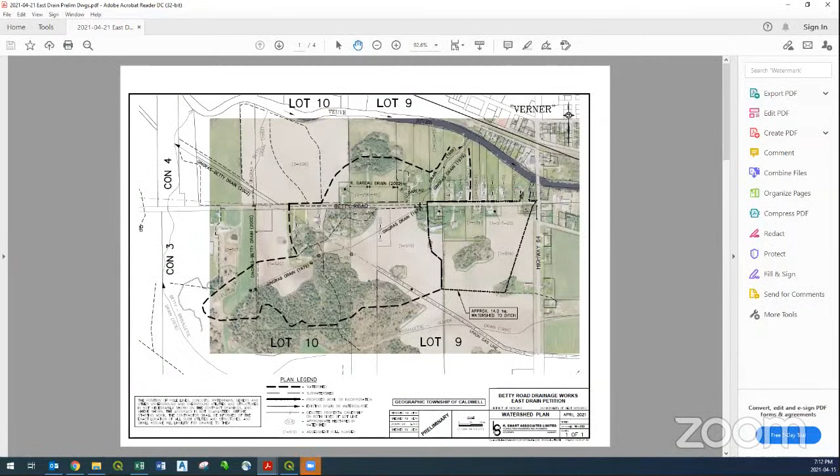And Melanie, would it be, in the midst of all this technological wizardry, possible for me to share my screen? I already gave you the powers. Okay, let's see if I'm clever enough. I knew you might have visuals. Yeah. Share screen, here we go. And I'm going to use screen number 2, share. Hey, Joel? Yeah. Here. Sometimes if you use multiple monitors, it won't work. Like if you're using an extended desktop, because we can't see anything, all we see is that you started sharing a black screen. You might have to get back on your main monitor. Okay. And I'll do that. If you want the watershed plan, I believe it's working. Okay, good. Yeah. Because I struggle to survive with just one screen.

All right, so the watershed, as folks are generally aware of, for the gully that we're looking to improve and do the drainage work on, is there at the east end of Betty Road. So everybody that's inside this black line received an invitation for this meeting tonight. So we wanted right from the outset to keep everyone that's affected by this drain, which for now I'm going to propose we give the name the East Drain. It's not particularly original. And if anyone would like it named after themselves, let me know and we could do that. But for now, we'll call it the East Drain.

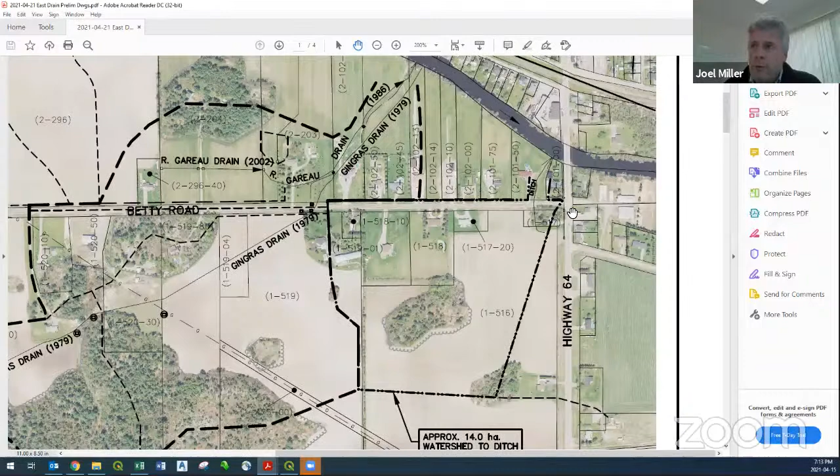And so we had a meeting just over a year ago to look at what our conceptual thoughts were on how this would be improved and what we can do to deal with the bank instability and the erosion and things like that. And then coming out of that meeting, the intent was for us to look into the possibility of having this job given emergency designation by OMAFRA, because that would allow us to go in and begin work in advance of having a report without jeopardizing the possibility that farming properties would be able to also receive grant for a portion of their assessment.

Now, when I spoke with OMAFRA last spring, they indicated that it was not a case where they can do emergency designation. They prefer to do that only for existing drains. And so since this is not a drain yet, we were not able to get the emergency approval from OMAFRA to carry on with some work in the field before we have a report in hand. So that's where that stands. So the task really is for us to wrap up the design, get it to the agencies, and get a report filed as soon as possible.

So that's more or less the highlights of what happened in 2020, and I'll freely recognize that it was not as much as any of us had hoped could happen in 2020, and that's unfortunate that we didn't make more headway, and that's on me, frankly. But I do recognize that we don't want to let this languish, if you will, right? So again, I'm now going to bring my screen down a bit more to hopefully show another drawing. Did that appear for everybody? Yes. Yeah. Okay. Very good.

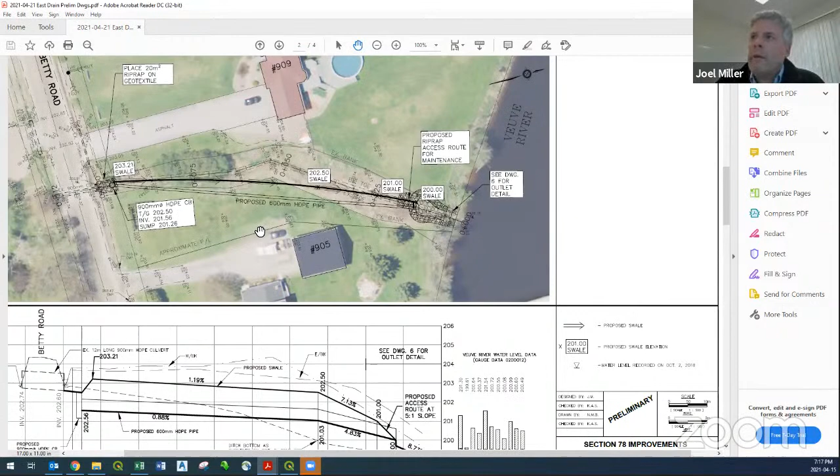The first is there ought to be a pipe as part of the system, because that would carry the vast majority of rain events and eliminate an ongoing flow. And then there would be a path for the water to take when the pipe was full. So perhaps in a really serious spring melt event or a really serious summer rain event, there'd be an overflow route. And so we refer to that as a proposed swale. And on this concept that we've put out here, today is a great time for feedback, Diane and Linda, from both of you and anyone else that's listening in, Lloyd as well as the road authority.

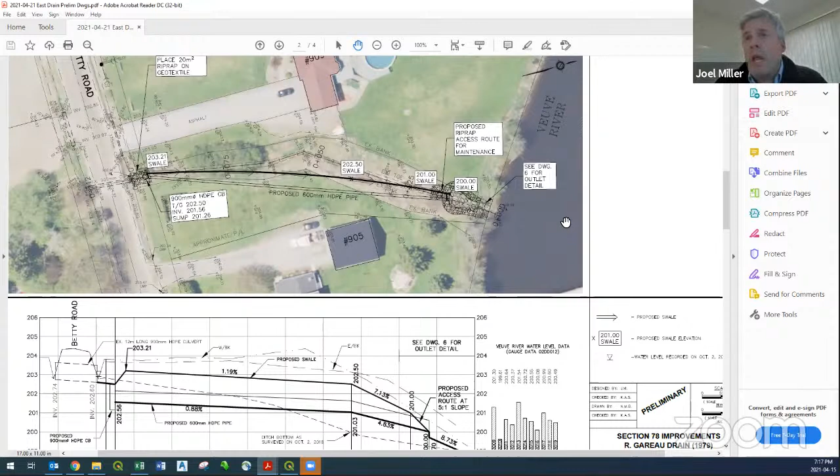We have just run the pipe in a straight line because it's nice when you can look in one end of the pipe and know where it ends up. It would be an option for us to lay this pipe in more of a curved pattern just inside what would be the east bank of the gully, and then have the center line of the stabilized ravine or the stabilized gully more closely aligned with the existing route.

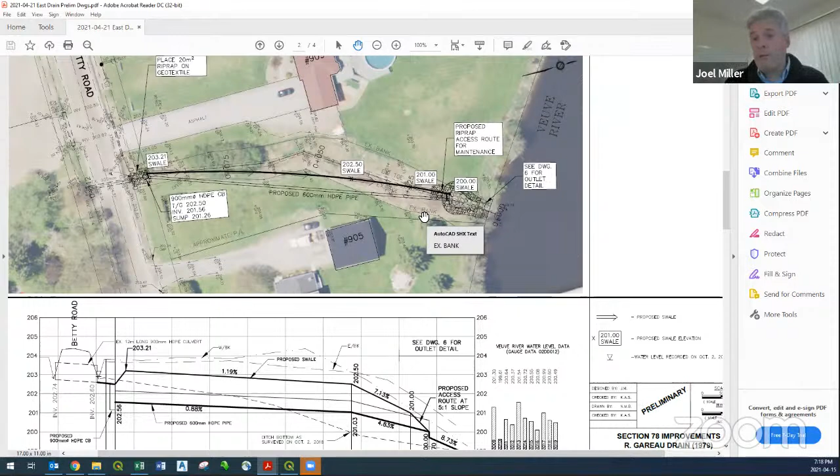But from my perspective, I'd rather see the pipe run straight, because then everyone will always know where it is. It runs between point A and point B, and there's no mystery as to what curvature it has without putting manholes and structures on it, because that just creates extra cost. And in this case, it's a short run of pipe. It's within sort of standard MOE guidelines for length of pipe between structures. It's just under 100 meters of pipe. So that's kind of the alignment for the pipe that we're recommending.

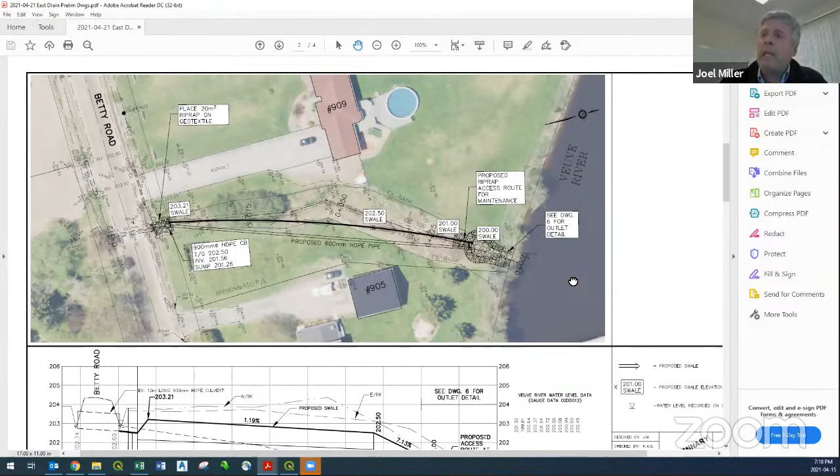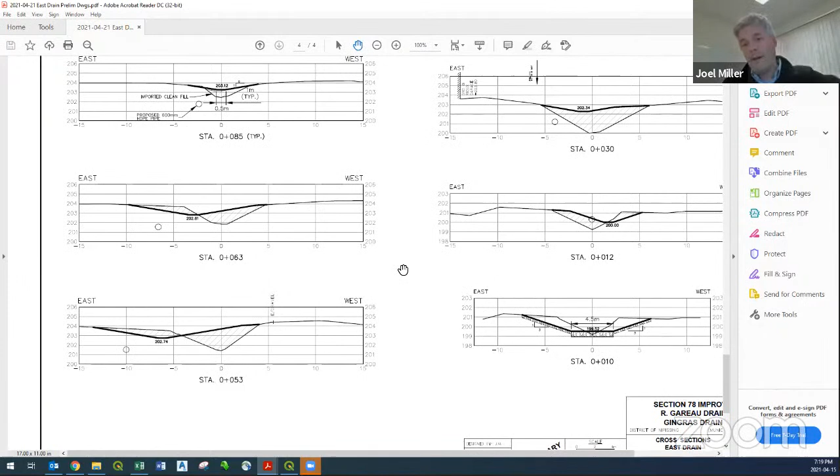And then what we're looking to do is backfill the swale so that it's not as steep and so that it's stable, most importantly. And so the cross sections that we have worked out, and this is just a bunch of lines on paper, if we were in person and we could kind of point and explain it firsthand, it would probably make quite a bit more sense. But we're looking to have, at least at this stage, backfilling the swale, backfilling that ditch with material that would be brought in potentially, so that most of that ditch would be mowable, right? So it would end up being a much shallower ditch than what's there now.

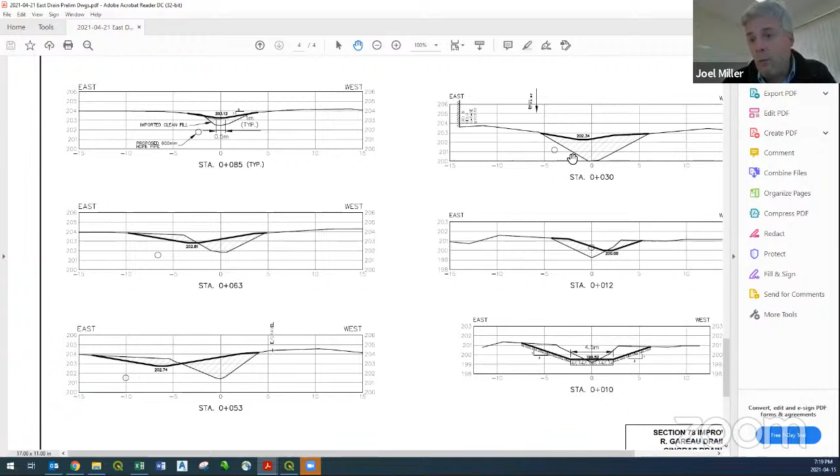It would still allow water to overflow during major events, but it would be stable, and it'd be quite easy for you guys to look after. If it's lawn and you want to use it as lawn, go back and forth across it, et cetera, then it would more or less be lawn with a dish in it that has flat enough side slopes that could be mowed. So that's sort of the concept we're working with now.

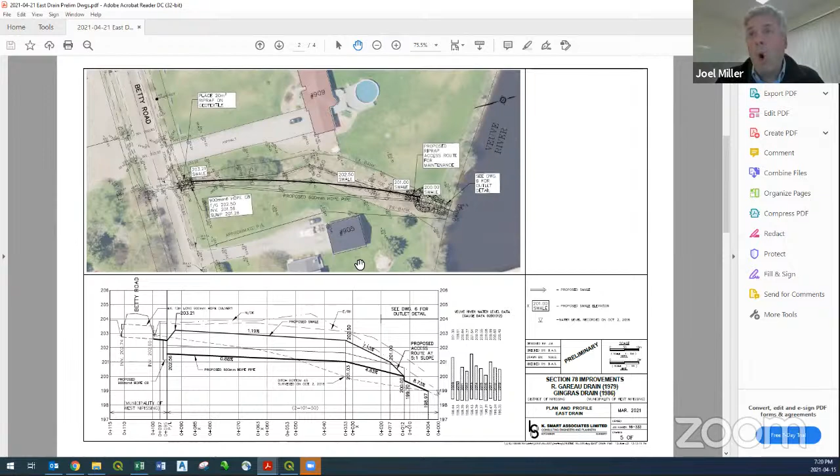Now, in chatting and reviewing some recent correspondence from you, Linda, I recognize that your objective is for this thing to be stable, and whether it is mowable or not is not as much a priority perhaps for you, but as I looked at the site and the condition and the setting for this project, it seemed reasonable for us to try to backfill this and get it stabilized, get it vegetated, and then make it easy for folks to mow and use.

And then the most important part of this whole adventure is here near the river, where the pipe would outlet. We don't intend to dump the pipe out right at the riverbank, because over time it becomes a very difficult to access maintenance issue, because it's situated right on the perch of the edge of the river. And so what we've done elsewhere and what I think is wise in this case is for there to be what we'll call an outlet structure, which is nothing more than a sort of dished area where the existing ravine or the existing gully enters the river.

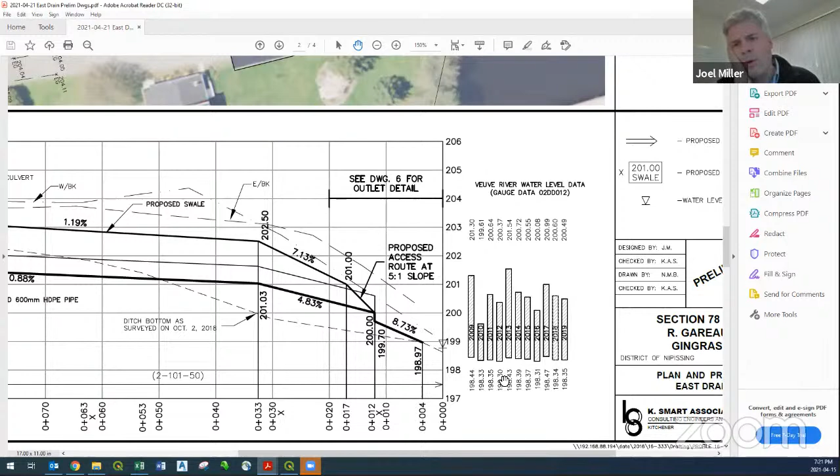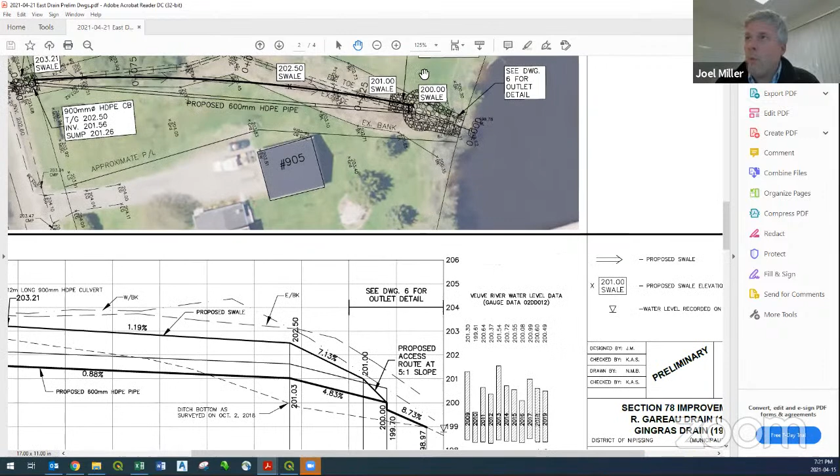That would be made up of very large diameter stones, angular riprap and these kinds of things. And I think I showed you guys a photo of an example of that from another job, similar to what we did at Delorme Road, Lloyd, the outlet for that pipe. And one of the reasons that it's important for us to do as much stone work as I'm proposing is the spring thaw. Oh, hello? Spring thaw. What happens when the water level comes up in the spring? That will prevent erosion. Exactly.

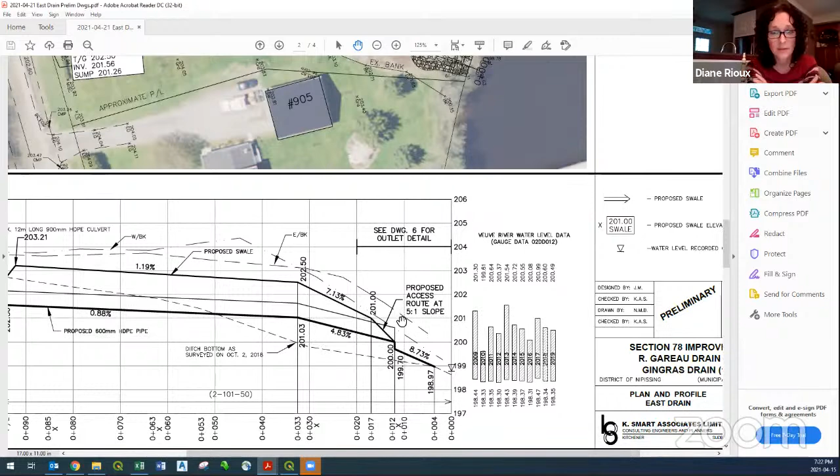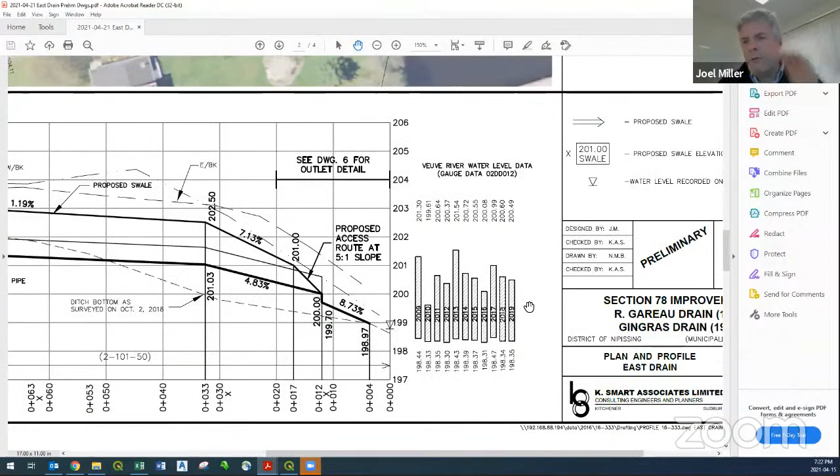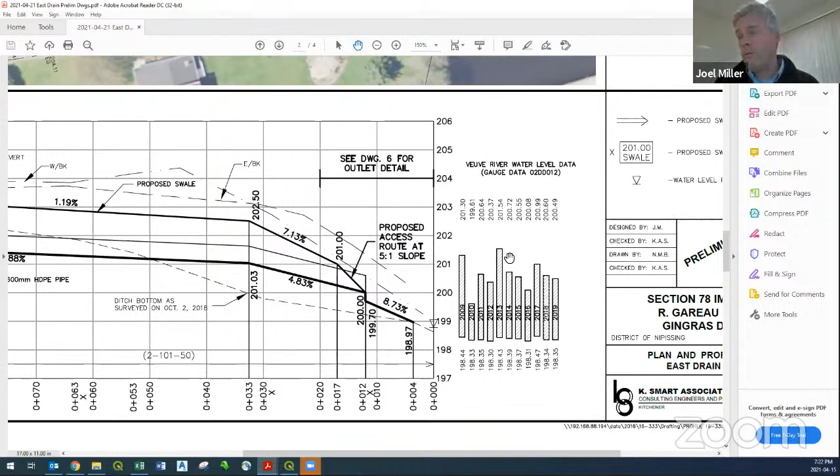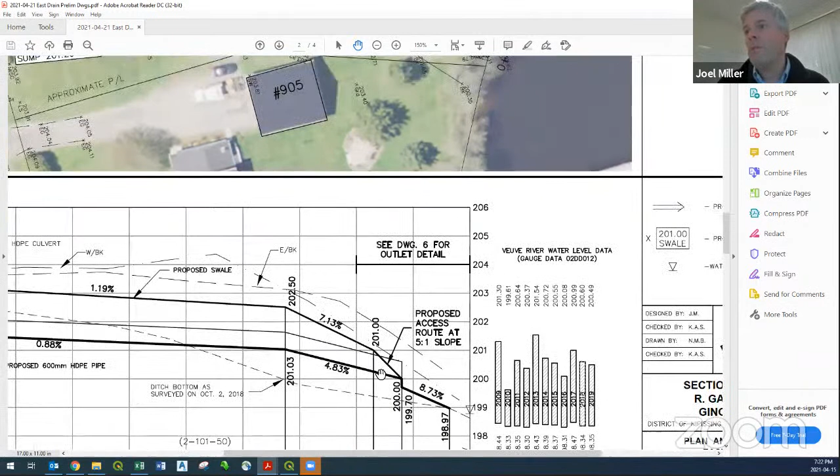In that area? Yeah, that's the objective, because on this profile part of the drawing, we've collected river level data from the gauge that's right there at the bridge, and we've related that to our survey. And it's clear that different years have different high levels of river water, as you would expect. But more or less every year, the lowest 20 meters or even 30 meters of this ravine experience a water level due to the river rising up and down. And so if that portion of the system can be armored with big rocks, then that'll stabilize it. And that's the objective.

So those are the three main pieces of this design: a pipe, an overflow swale, and then a bunch of rock down at the bottom by the river. So that's kind of the concept design we've put together.

And I can even say we've done an initial cost estimate. We haven't looked at all the details and sort of dotted our I's and crossed our T's. We'll have a more up-to-date cost estimate when we have our public meeting with the whole watershed. But our construction cost estimate for this work right now is between $50,000 and $60,000. So that's what we are estimating based on what we've put together so far.

And one of the comments, Lloyd, that Sean had made for us to look into would be up at the road where the existing culvert comes under the road, and then Linda's driveway culvert empties towards this ditch. Right there near the road ditch, we would put in a catch basin as a place to take the flow into the pipe. Okay. Yeah, so we've been in discussions with Sean a little bit about that concept.

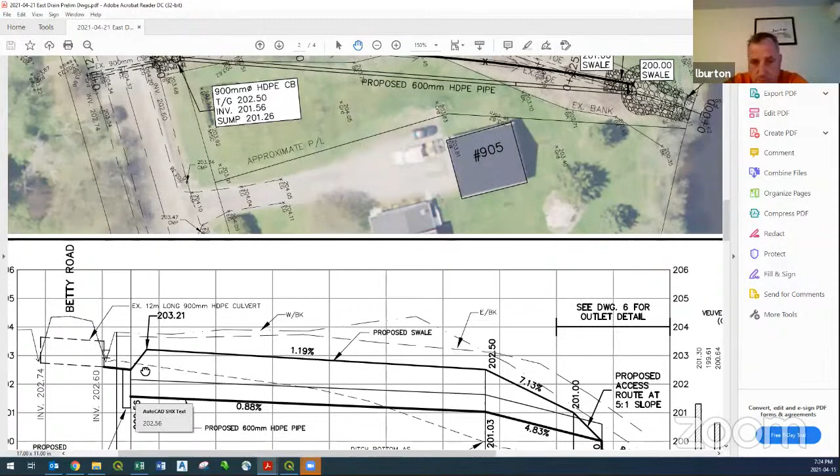And then the idea would be water would, under all normal circumstances, run through the pipe. But if the pipe was full or, say, iced over or something of that sort, then water could spill over the overflow swale before the water level in the ditch rose to a point that would cover the entire road culvert or back up over Linda's driveway. In fact, that spillover point for the swale is 1 meter lower than Linda's driveway. Okay, so there's room, yeah, lots of room.

Yep. Can I just say something quickly for those who are listening? I suspect they were all at one of the meetings. The reason for this thing in the first place is because the type of soil in this area cannot take the flow of water. Something has to be put there because it just keeps washing away. The more water goes down it, the more sediment gets washed into the river. And the pipe seems to be a solution for that.

If the water isn't running steadily on through the ground, there's less collapse, and the soil's not being washed out to the river. Mm-hmm. Yeah, there wouldn't be flow in the bottom of a deep ditch anymore, and then the other factor is there won't be backwater from the river loosening the side slopes of the banks either. So I think that's the direction we're heading with it.

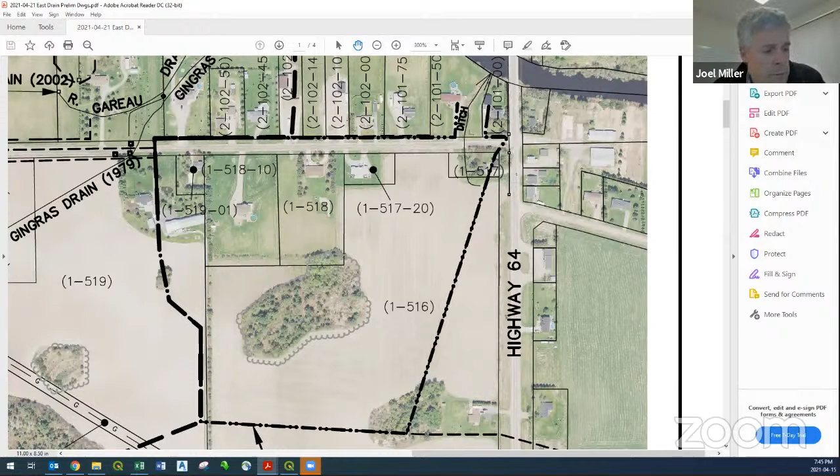And I don't know, Melanie, I think you would probably be able to speak more knowledgeably to the sort of future land use potential. Yes, well, I was just going to point out that, first of all, this is a really little watershed. So this watershed only consists of 1, 2, 3, 4, 5, 6, 7, 8 properties plus the road. The biggest property in this watershed already has a house on it. And even if that house was severed out, another house can't be built on it because it's zoned agriculture and it can't be developed. That's this house down here.

Yeah, that's Joelle's house. So that property is not going to ever have any houses on it. And the other ones, there's really no further development potential on any of those either, because the houses are kind of built right in the middle of the lot. So I would say the likelihood of anything happening in this little watershed in the future that would impact the drain would be very, very low. Mm-hmm. I can't imagine what could happen that would do that.

And I guess another comment would be that the report that's also going on to the west clearly delineates that the service area for this ditch does not extend any further west than this divide right here. It will not either, is what you're saying. There's no risk to us that the problems down the road are going to be redirected in this direction.

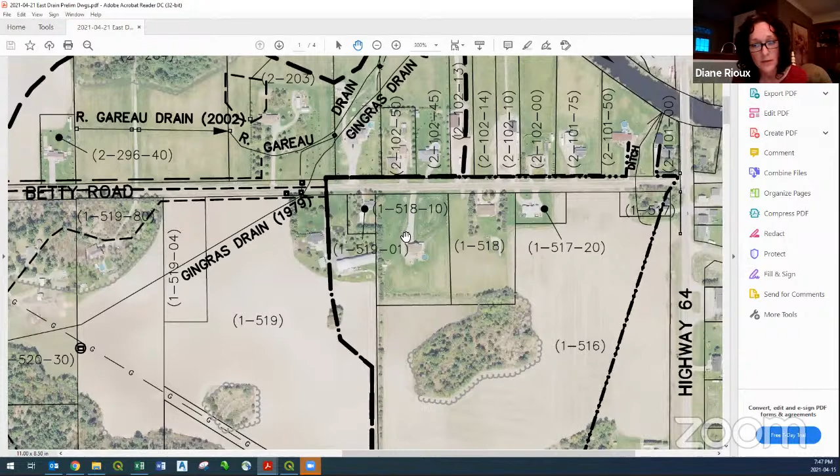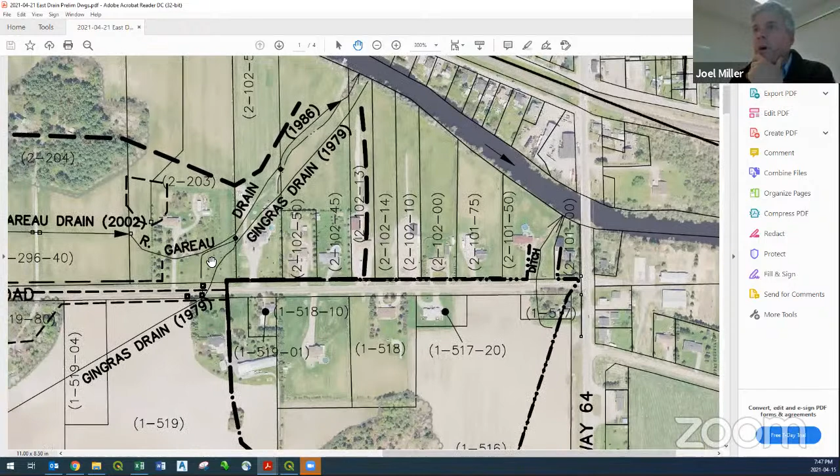Exactly, because this report that's going on for this drain is proposing improvements to be done along the historic corridor. We've done an options analysis to bring this water all the way down the road and then this way, but that doesn't make any sense financially, and it doesn't make any sense considering what we're trying to address down here. So I've explained that to a handful of the landowners that I've talked with in the interim further to the west, Renee and Peter, I believe, mostly. But that'll be part of the presentation I give at the public meeting later in the spring.

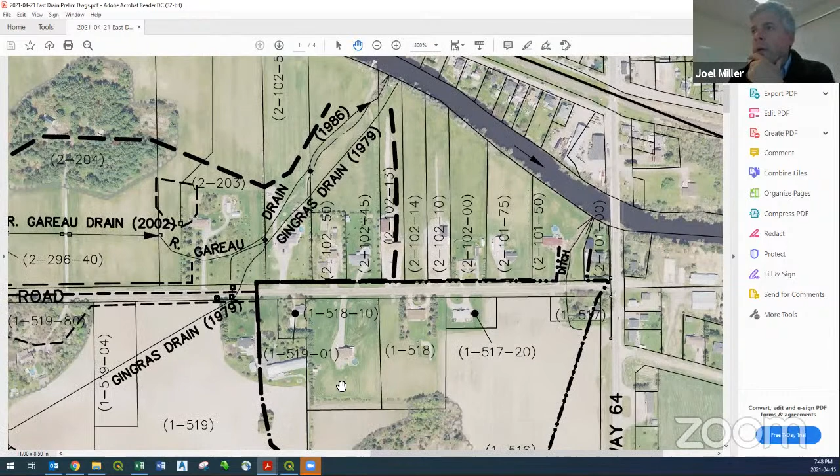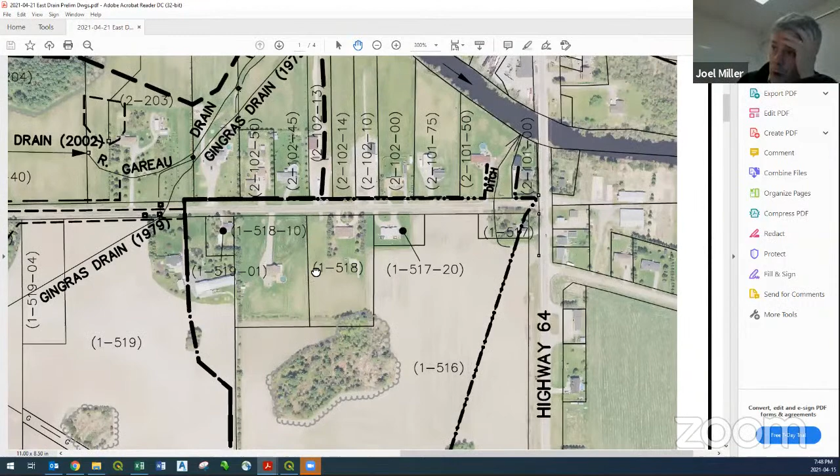And then the other comment I was going to make, if there were future severances in this small watershed, the Drainage Act requires that those new small lots be allocated a share of the assessment that was originally made to the big lot. That way, every landowner in the watershed continues to bear a portion of future maintenance costs. And then the other reality is, given the size of the watershed and sort of standard engineering design practices, incremental increases in flow within the scope of what's likely to occur in this watershed would be adequately handled by the system.

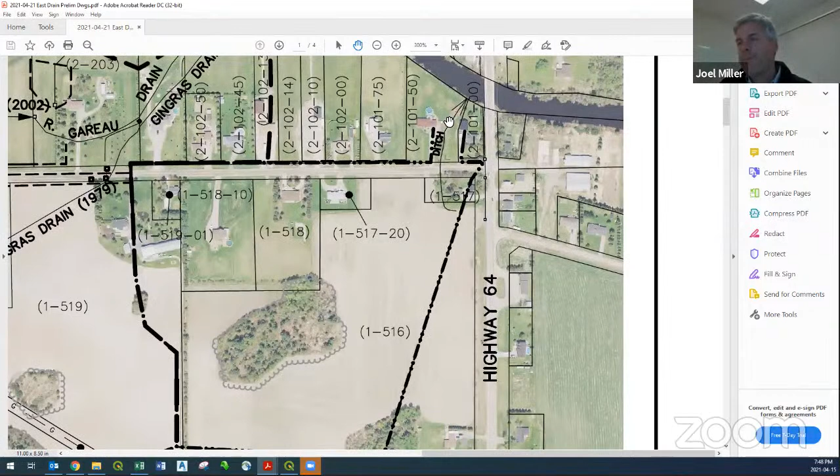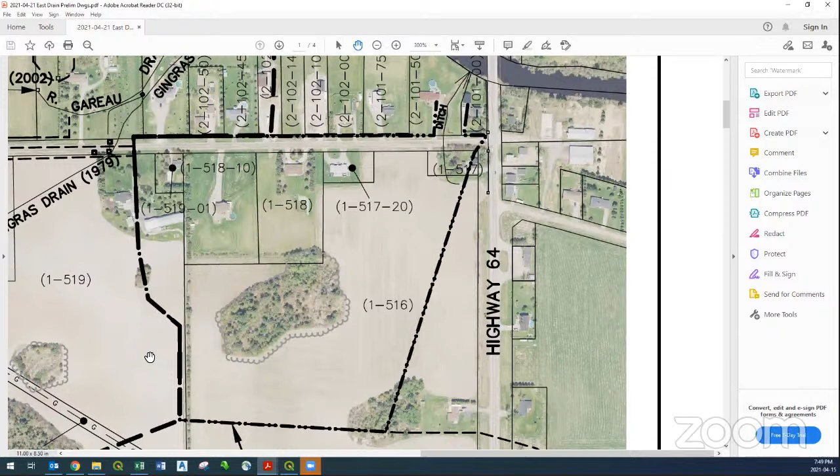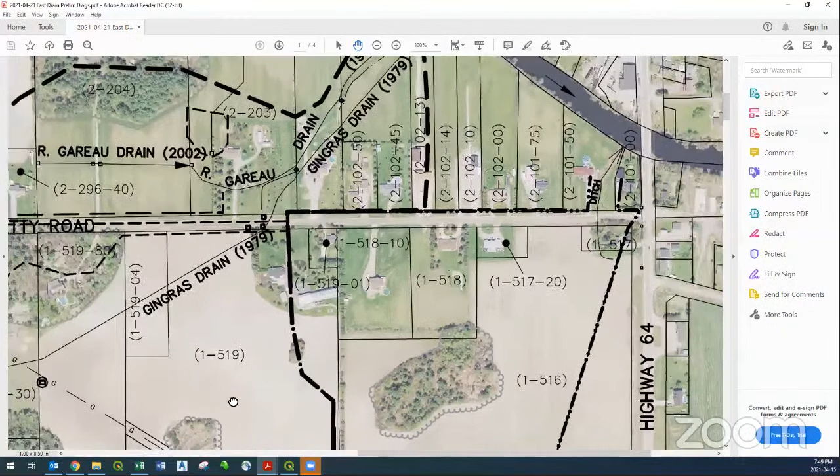Yeah, Joel, your watershed that you have established on this plan. Yeah. Your design is specifically designed to that watershed for that outlet pipe going through the Bazinet property. Yep. The Bazinet property. So if that watershed was broken up to the west, say, that would cause you problems, but that would only be if somebody broke that watershed. That's not allowed. Yeah, it's not allowed.

Right now, the divide is Briette's laneway because he doesn't have a culvert under it, and so that is the divide now, and that's established in my report. His lane culvert would be under the municipality's jurisdiction, and so there wouldn't be additional flow that's going to be brought east.

Yeah, so these watersheds are very, very important, and it's very important that they're respected and that nobody goes monkeying around with them. And if somebody does see a watershed getting fooled around with, then the municipality should be notified, and the proper action be taken.

And that's when you show up with your big hammer, right, John? And my big stick. There you go. Yep.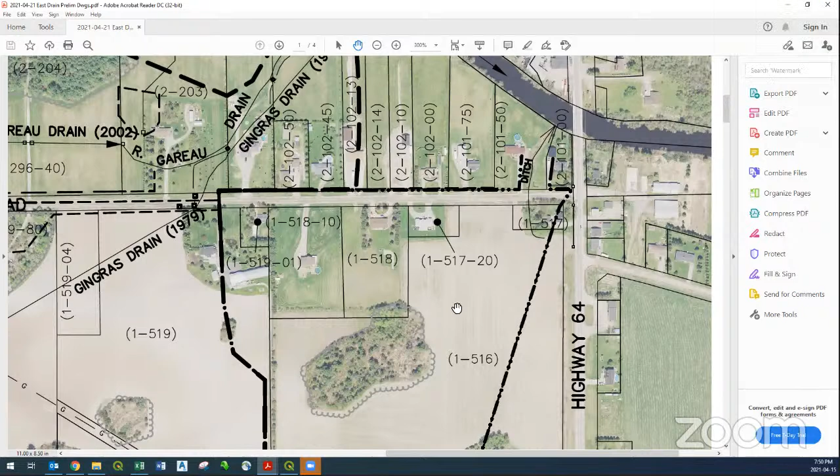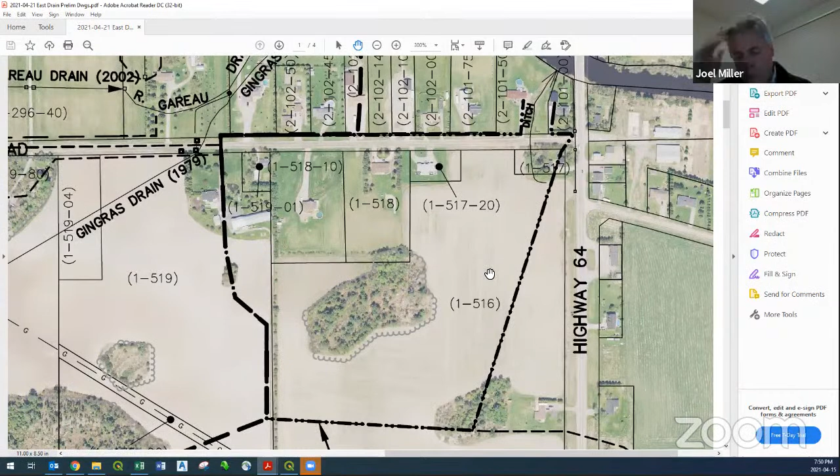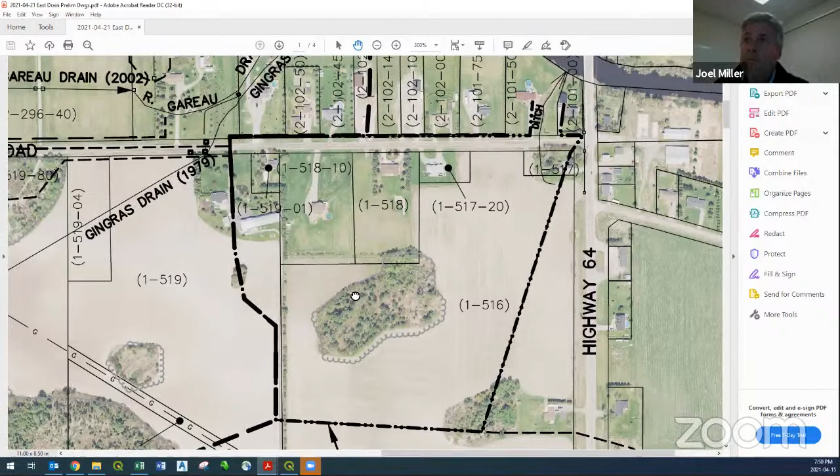No, on this project for the investigation for the drains further west, there's been considerable discussion over the course of my involvement about that particular topic of watershed delineation, and so that'll be something that I'll speak to when we're getting together later this spring with everyone. So the meeting this spring is going to include both watersheds? Yeah. Yep.

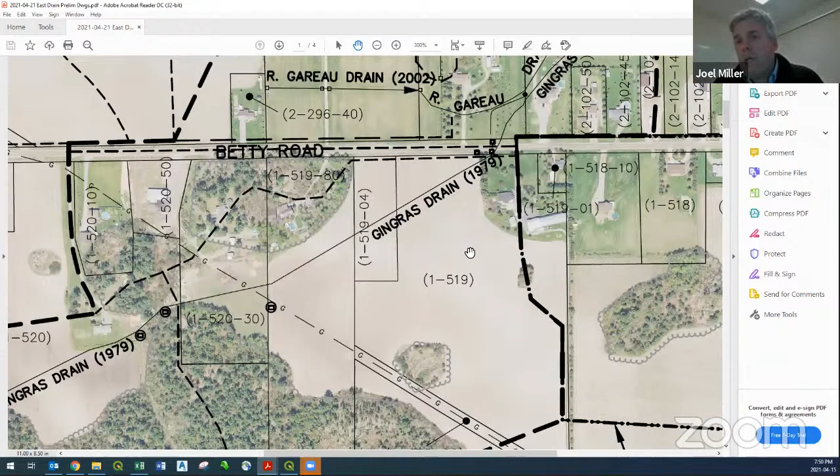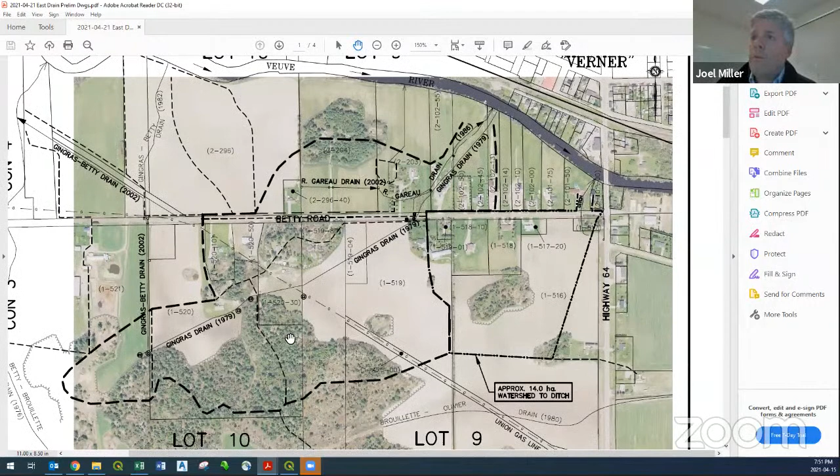Because the intention is, right now this road has, I'll zoom out a little bit, it has the municipal drains along this road developed over time as needs arose. And so there's 5 or 6 municipal drains just in this vicinity. So the appointment we've been already given is on the Gareau drain and the Gingras drain. And so my report was going to deal with both of those under a single report.

So my recommendation, with this new section 4 petition that came in after the initial investigation started, would be that this work that we're going to do on Linda's property, as well as the work that's going to be done on those other drains, all be presented in the same report to all of the landowners. Now, just because you folks would be at the meeting later this spring doesn't mean you're going to share in any cost or assessment for the work that's further west. Your share of the cost is related to the drain that you're part of the subwatershed for.

But I think from the municipality standpoint, from a maintenance standpoint, it's easiest for them if they have one updated report that documents where all the drains are, what are the current assessment schedules, because one of the other challenges in drain watersheds is that when there's severances, it's important for those assessment schedules to be updated. So when the drainage superintendent does maintenance, he can spread the costs out over the people that actually own the land in the watershed at the time. So that's kind of where I'm heading with it. So the name of the whole report might end up being something like the Betty Road Drainage Works, and then it'll have all these individual drains that are going to get improved or built for the first time.

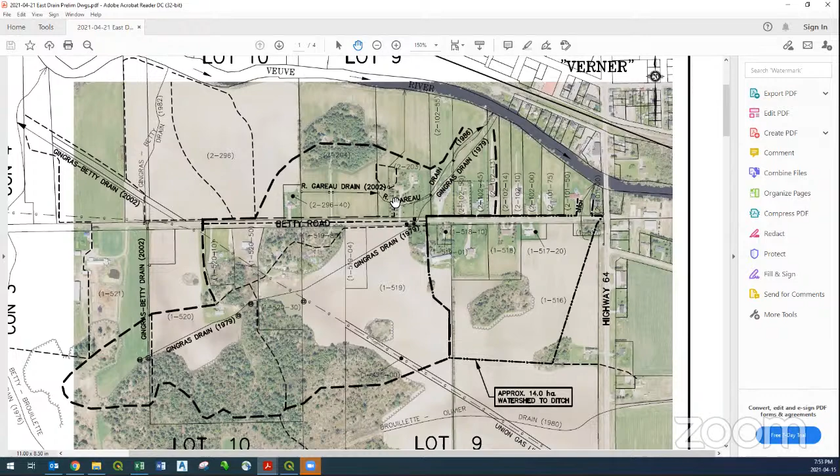And I'm not sure if you gave that information, I might have missed it. Did you mention how big the pipe would be in the ditch? I may not have. We're looking to put in a 600 millimeter pipe, so that's 24 inches. Okay. And the pipe that's under the road right now is considerably larger than that. Is that going to work? Yes, it will. So the pipe going under the road is 3 feet. So a 2-foot pipe obviously has less capacity, but what we're putting in is a smooth wall pipe. And so it would have more capacity than corrugated pipe of the same size.

Understood. So the excess water would not erode the rest of the property in the spring, because obviously there would be excess water, right? If it's a 3 foot culvert and that's a 24 inch, the excess water would flow down and it would not damage the property. Yeah, the idea would be that the extra water would very occasionally flow over the swale, but that swale will be vegetated and will be able to handle the water. Okay. Because it's not going to rise high enough to damage the building around it? No, because the gully will be low enough. Because I don't want to lose my driveway, absolutely not. And Diane doesn't want to lose her garage.

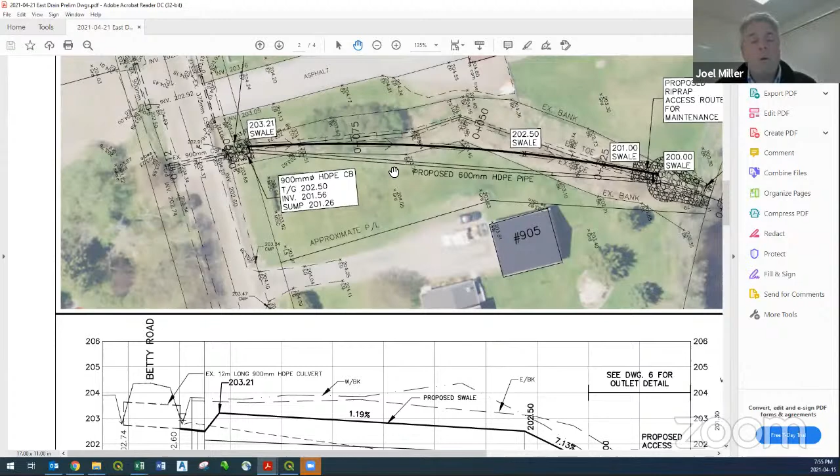So you can give me 100% guarantee that no more erosion will occur on the property. I can give you a 100% guarantee that her garage, and don't call my insurance company and tell them I said this, but what I'm looking up right now, and I'll present all this in May, is what's the design storm that we're designing to, whether it's the 100-year or the 25-year storm. So the pipe we're putting under the yard is being sized to the 25-year storm. That's a storm so bad, statistically, there's a 4% chance it could happen every year, but most of the time it would happen once every 25 years or so. So it's kind of a squirrely way to talk about pipe sizes.

But that's more or less the only thing I'm questioning as well. What worries me is when there's erosion, it could occur underneath. You don't see it until it erodes, right? That's what happened here. It's like you've explained, it happens underneath and then it collapsed. You don't see it collapsing until it collapsed.

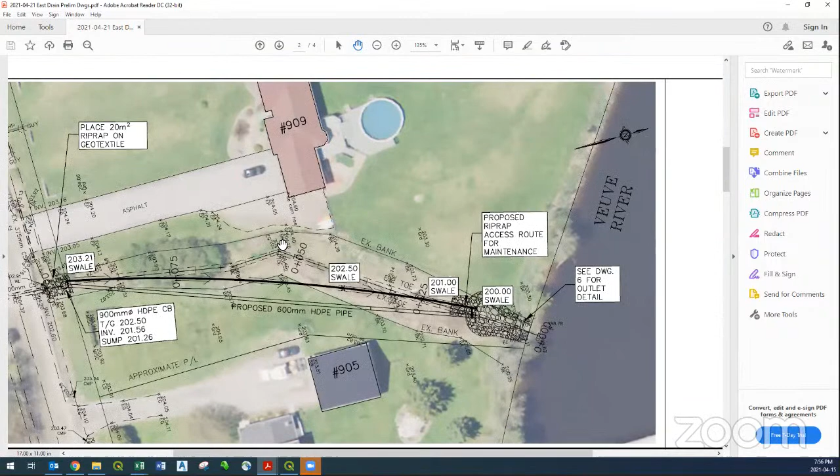My worry is, what is underneath my driveway right now? Is there potential to collapse any time? That's my worry. How do we see if there's an erosion problem that we don't see as of yet? That is just like a time bomb that could happen anytime. Yeah, that's a good question.

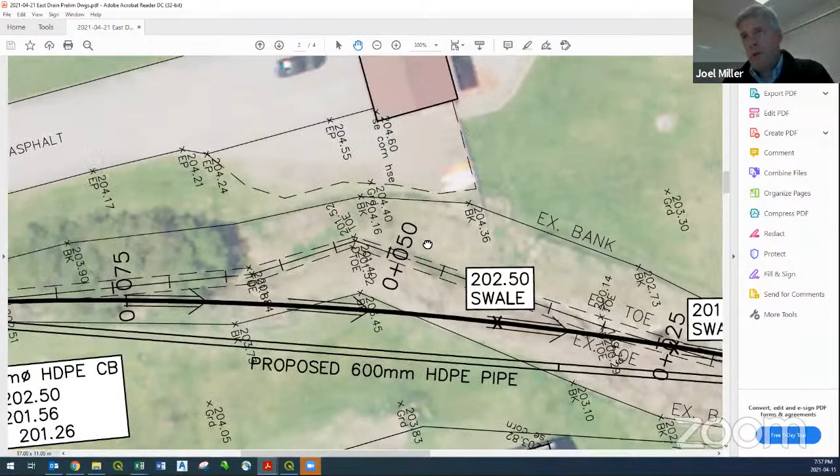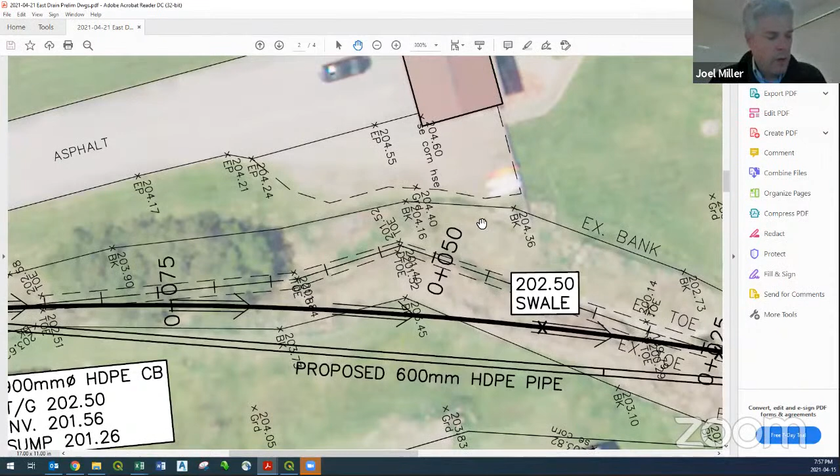So when we did our survey along your driveway, and this is shown on the screen, I realize your screen may be kind of small, but one of the questions I wanted to ask today is whether you've seen any changes to the top of the bank near your driveway where you have that little parking area. Mhm. No, I don't think we've seen anything, no.

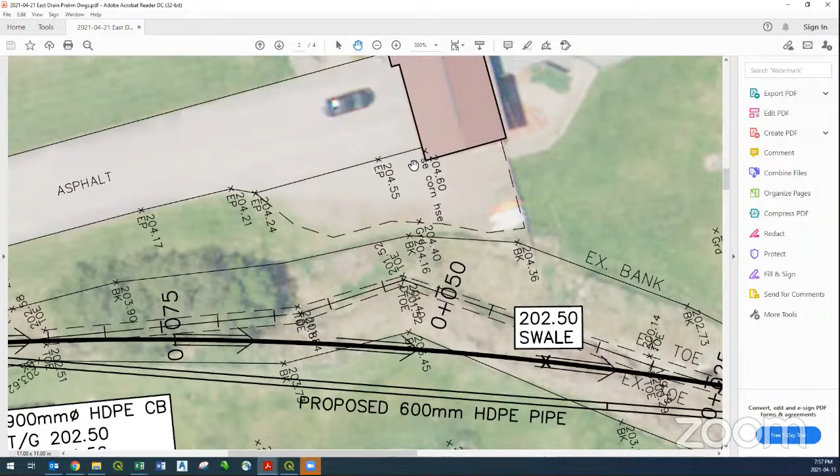But we didn't really walk the property. We should maybe do that. I will do that before the next meeting. Okay. Just looking outside, no, I did not see anything. But I did not check the width of the groove that runs to the river. You remember where you could put your hand in there? Yeah, I did not. I'm not sure if it would or not. I will have to verify that.

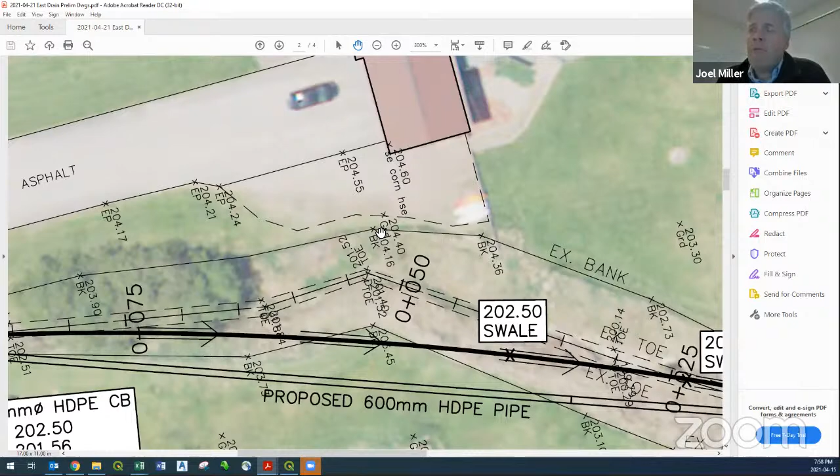Okay, so hopefully if I don't see anything, it's because everything is good. Yeah, it's okay. At the edge of your driveway, if you don't see any changes happening at the surface, then that bank underneath has also not moved. Okay. That's what you would know.

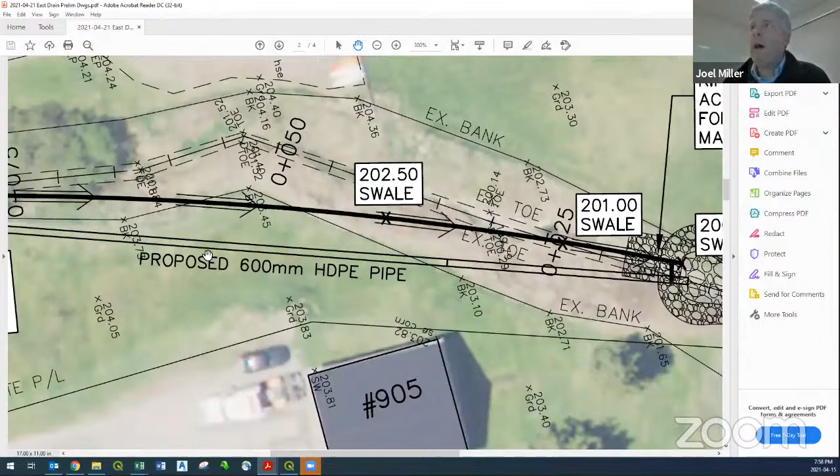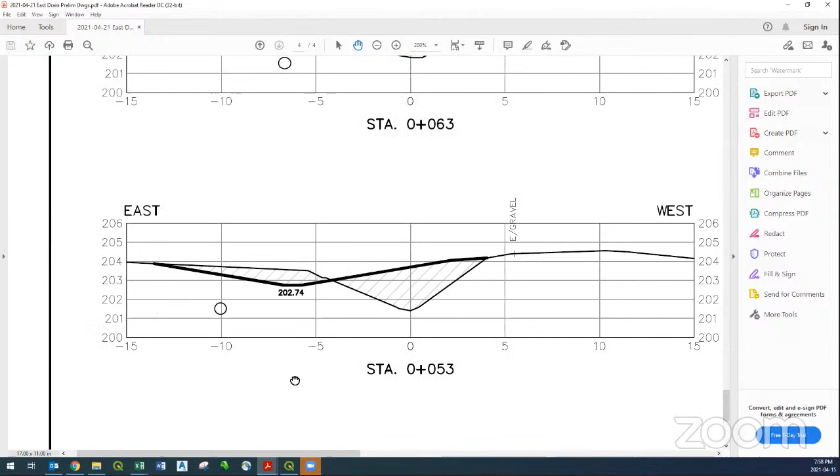And for an example of this, we do have a cross section of the ditch at your driveway. So that'd be right around station 55 or 60. Yeah, that's good, Joel. I was going to get you to bring up the cross sections, and maybe you could explain the pipe and the cross section, the overflow. Yeah. So this is a picture right now. Does that appear on most people's screens? Yeah, we can see it.

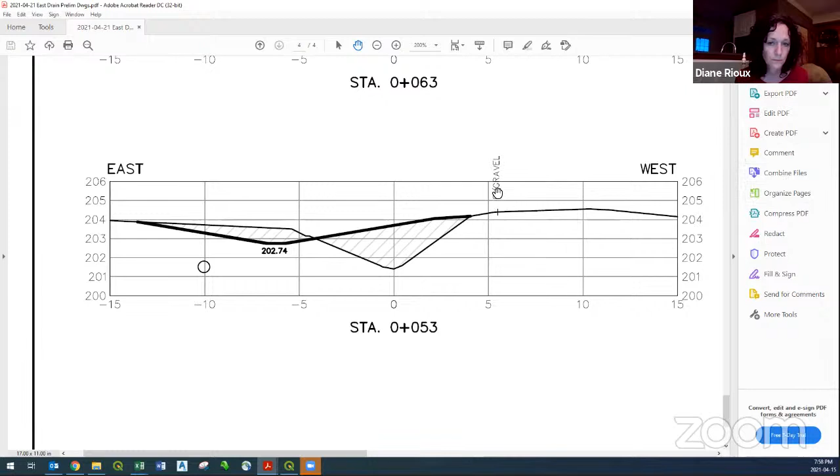Right here, with my little mouse hand, I'm tracing where the ground is today. This is the existing ditch bank, and there's a note here that says edge of gravel. So on this side of this little drawing, we're on Linda's property. And here we're on Linda's property too, but we're a lot closer to Diane's. So this is the east side. I'm standing in the ditch bottom and looking upstream, so that would mean I'm looking south.

And so this is the shape of the ditch today. I would say the top of the bank we surveyed relative to the edge of your existing driveway is about 1 meter, right? Not a lot of space. From where you park to where the ground really drops off is about 1 meter.

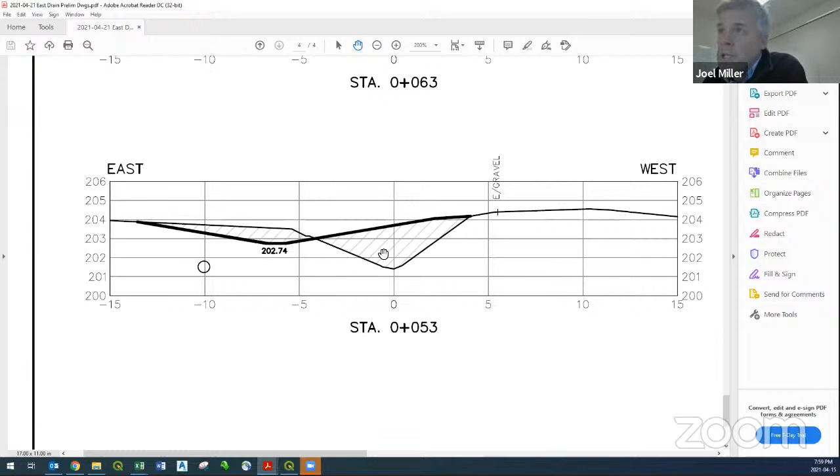So what we're proposing to do is to move the location of the low point further away from your driveway. It would move about 6 meters to the east at this location if we stayed with the straight line swale design. We'll excavate some material to create that low point further to the east, and then some of that material can be used to fill in the ditch that's there.

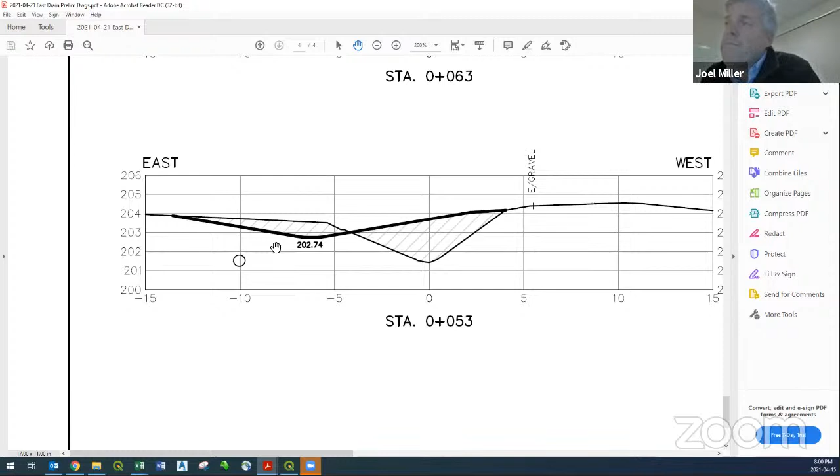And then there'll be a gentler slope coming off your driveway. The idea would be that we can get a good vegetation cover on this, so it can easily handle the periodic flow on the surface. Okay. So the dark black line will be the new ground. Exactly. Oh, I see. And then the round at -10, that's the new pipe. Yeah, you're looking at a cross section, you're looking through the ground. That's how you look at these cross sections.

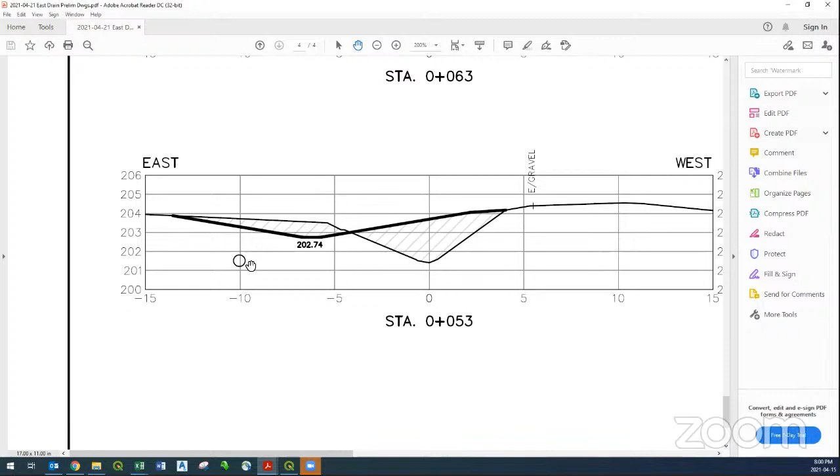Okay, perfect. So on the topic of these cross sections, Diane and Linda, any thoughts on this approach, where we move the center line of the low point a little further away from the driveway and more into the midpoint of the property like this? Oh, I'm okay. I don't have any concerns about it. First of all, it's not on my property.

But the issue is resolved. There's no more risk to my property, in particular the garage, if there's a pipe there. I understand the concept of the swale, and even if there was a washout in the swale, it would rebuild itself over years, because it's vegetation. We're not paving this thing. It's a vegetated area. I understand that. Yeah, I'm fine with it.

Yeah. If the swale ends up being a little further away from where the existing ditch is, that's okay from your perspective, Linda? Yeah, yeah. As long as this is the cheaper alternative, like we don't want to be increasing cost for the sake of appearance. Right. Yeah, no, and I heard that loud and clear from Linda as well.

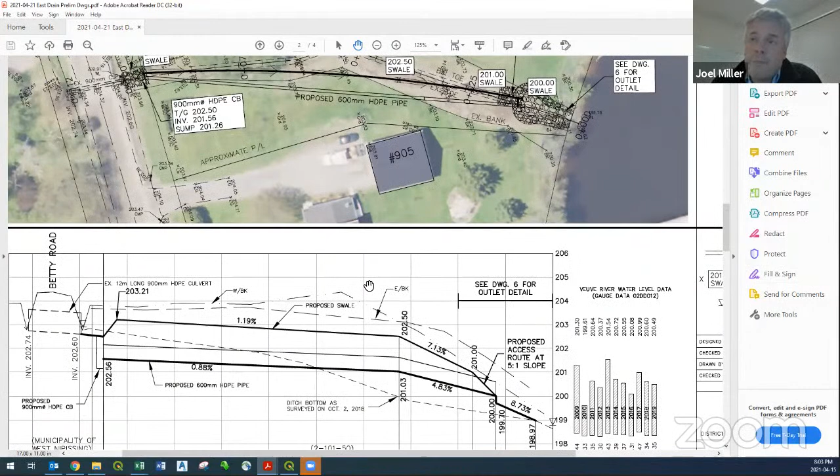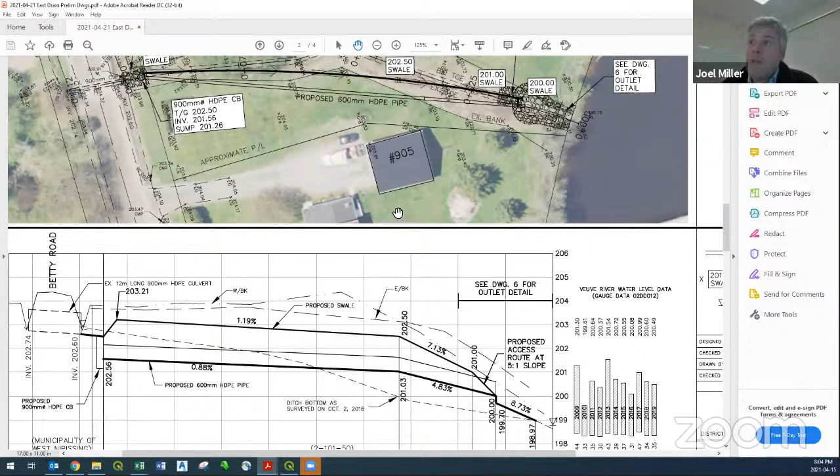So at the time of construction, this plan and everything we're seeing is a guideline. So there is some latitude or flexibility in a little bit of fixing things, or if you don't particularly like something or like to see something a little bit different, within reason, there is flexibility too. So this isn't set in stone 100%. There is a little bit of flexibility, but we do have to follow all the design and that type of thing. So certainly at this stage, with me putting ideas on paper, there's definitely flexibility.

And then, like John said, once it gets in the report and we go to construction, there are certain features of this that couldn't change. The size of the pipe, the way we design the riprap rock at the outlet by the river, the fact that there will be an overflow swale of some form that absolutely needs to exist. But some of those, the specific location of the overflow swale or whatever, we would go down the path of doing it the way it's written in my report, unless there's a good reason to alter it.

And the only good reasons I could think of is if it's going to cost a stupid amount of money, more than we estimated, or you came in and said, well, we're thinking we need a 5-bay car garage here or something, right? Gazebo. Yeah, or gazebo, there you go.

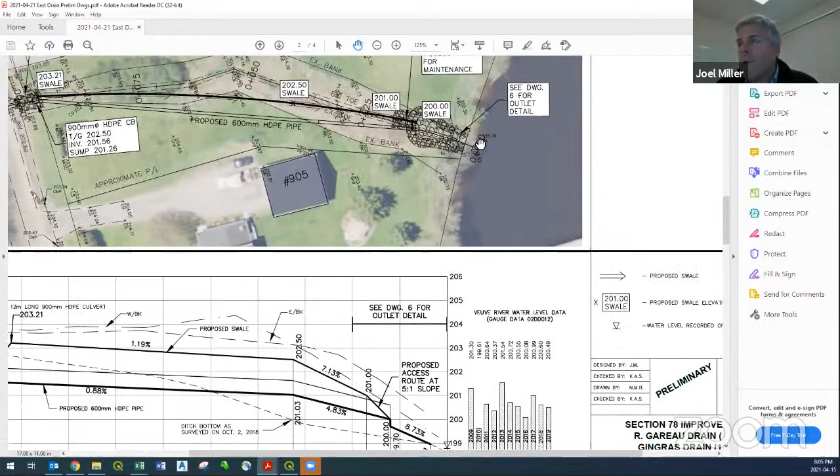But the pipe is going to end how far from the river? That's a good question. So the pipe is going to daylight. The end of the pipe is about 8 to 12 meters from the edge of the water. So whatever that is, 25, 30 feet? About that, 30 feet, yeah.

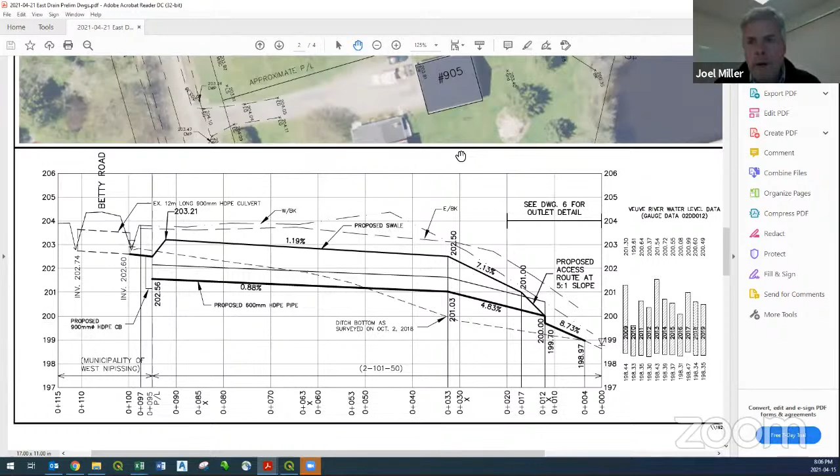So, this has been a very productive discussion. Any other thoughts? One of the things, Lloyd, I'll mention to you, we chatted about it briefly with Sean, that we do have to deal with is that there's a buried water line. There's a water main on the north side of the road, and it is, we think, probably in the back of the ditch, sort of the ditch back slope. So we'll figure that out during construction.

We have room to wiggle this catch basin a bit if we need to. Yeah. There's always a little bit of wiggle room when it comes to those sort of things. And then in terms of gas mains along this road, I think natural gas is on the north side too. Okay.

And would it be probably closer to the property line than the water? I would think so, because we had the gas just a few years ago for us. Is it closer to the driveway or the ditch, the line, when they brought it in? Middle? It's about in the middle. Okay. It's about in the middle.

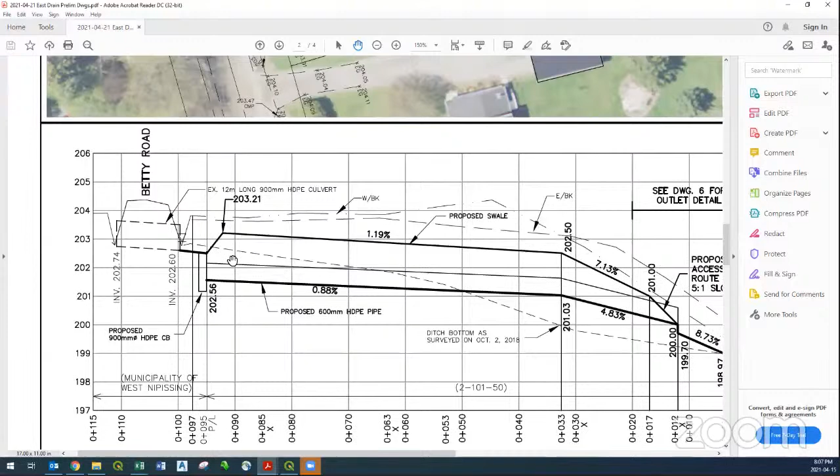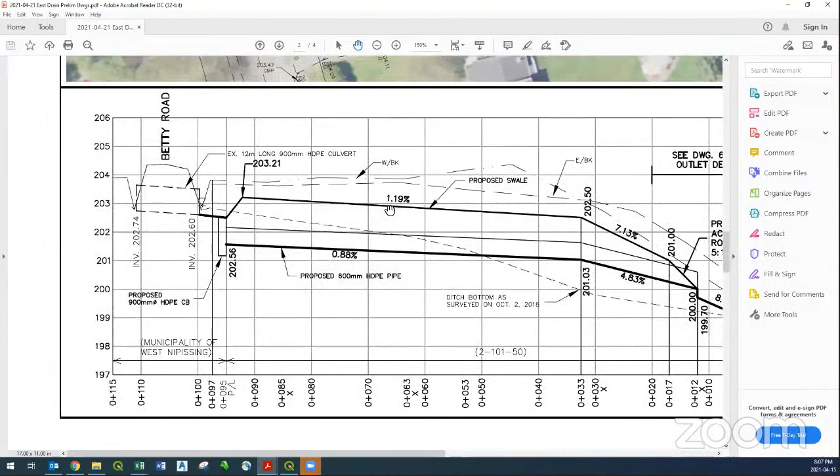The gas line? Joel, yeah, Joel, maybe we should get locates and maybe expose the gas line and the water line to see what elevation they're at beforehand. Yeah, might be a good idea. Yeah, that would be something we can look into.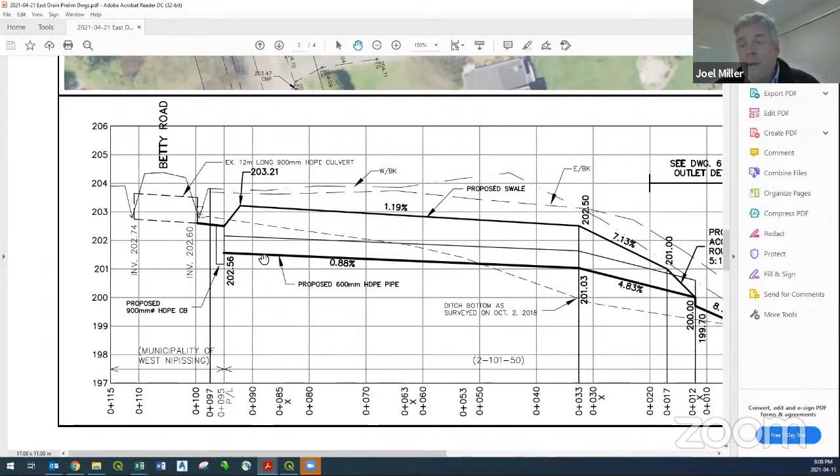The backup plan, if those are in the way, is gonna be fairly straightforward, because we can just even shift the catch basin onto the inside private property, because it'll be part of the drain. So whether it's on the road allowance or inside private property and out of the way of the gas line, it'll all still function the same.

Because you're gonna dig the ditch a little bit there, I guess. Right after the culvert? Yep. So right after the culvert, there is going to be a fairly deep hole, because we got to dig in a catch basin and a pipe. So the digging we do here will be deeper than the existing ditch as we lay the pipe. Yeah. Okay, in fact, this pipe is going to be maybe 1.2, 1.5 meters lower than the existing ditch right now, okay.

So it's gonna be set up like a catch basin, the rock with the pipe below it. Is that right? Yeah. Okay. There'll be a catch basin in the ditch bottom to accept the flow. And then it drops even further down into a pipe, which should have good frost protection. The other thing that helps us with frost protection would be when snow cover, right?

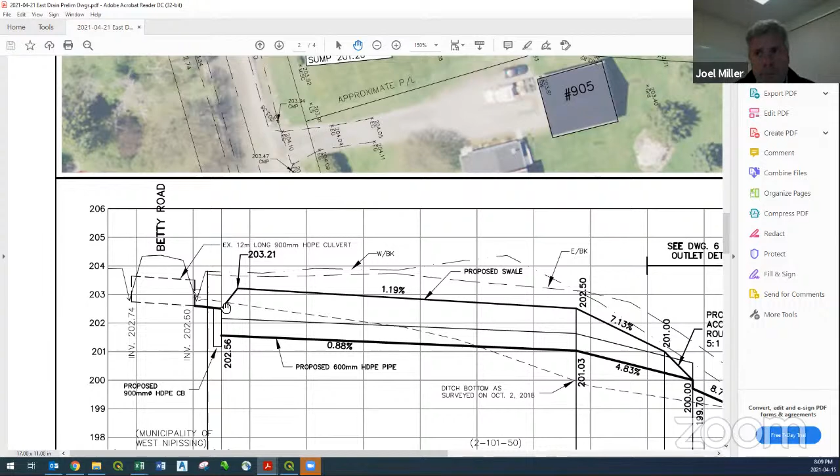Yeah. But I'll be quite eager, Lloyd, to get more input from you and Sean as far as the finer points of catch basin design, so that they are more resistant to trouble during the spring melt. Okay. Yeah, for sure.

So those are pretty much all. And then in terms of finishing the property when it's all done, the concept there would be to have some topsoil and some seeding that we would do. We wouldn't plan to import sod or anything like that to cover the whole area, because it would take a pile of water. Of course, you have a river nearby, you could water it, but we would get topsoil and seeding. Okay. And the contractor would be responsible probably for an initial watering, see how it's done, and then it would more or less be Mother Nature or the landowner's initiative to look after watering. Yeah, I'm good with that.

And then the other thing that is typical with all drains too is when we're constructing them in one season, we then enter winter. And things happen over winter in terms of a little erosion here and there, small little patchwork cleanup that then has to get dealt with when the snow melts in the spring. And that's fairly typical, and that would be part of the cost for the project up front. It's what we call the warranty period.

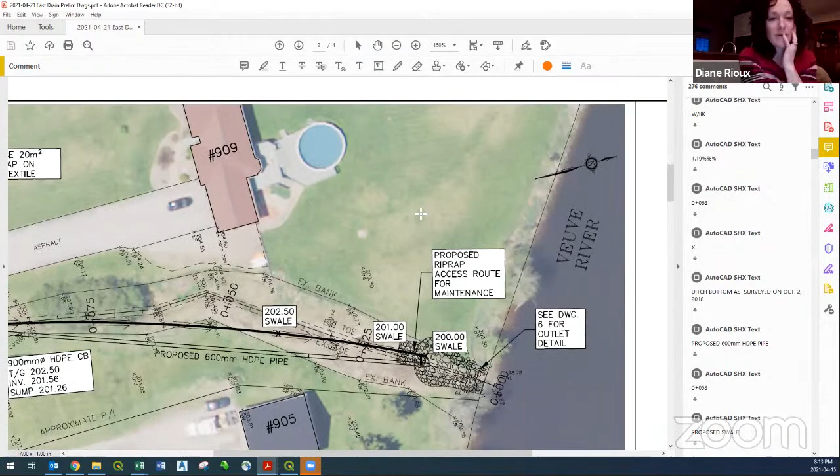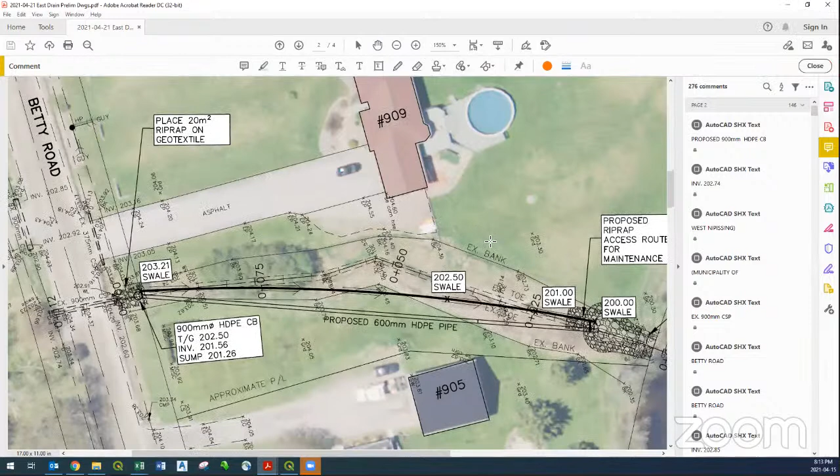Oh, okay. It's not even close to the ditch. Oh no, it's to the left of that pool. Oh, good. Okay. It's even more on the west side of our property. Oh yeah. So then, from a utilities standpoint, there's nothing under the ground in here we need to worry about. No. And then Diane, on your side, we're gonna ask them to be careful with this tree. I don't see a reason why we need to disturb it. They'll be working around it, but hopefully it can stay.

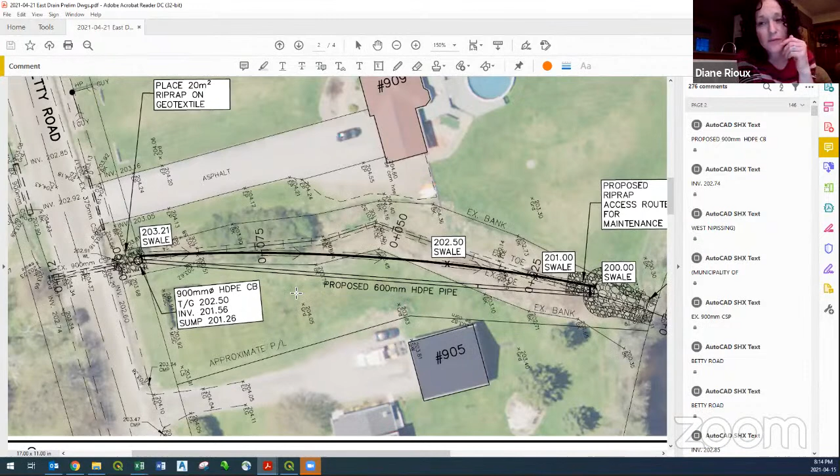Yeah, it's very steep behind our garage. It really drops off quickly towards the river. I don't know, unless they're really coming in on the other property. I don't do construction, so I don't know how they're going to get at it, but I can tell you where those spruce trees are, that's a very steep drop. You're not going to be able to bring equipment in there.

Yeah. My thinking is that they're gonna actually sit in the bottom of the gully with a machine to build this riprap outlet structure. That's how it's all gonna be done. It's tough access, but that's just always the way it is when we're working near an outlet like this. So that was my thought. So I don't see a need for them to use your laneway, your driveway, or anything. Or, like I say, mess up that tree.

And then you guys had mentioned the scrubby trees that are obviously growing in the ditch. Yeah, no. If they need to go, they need to go. Yep. So they'll be gone, and you'll end up with lawn. Yes. You know what? It's not a big deal at all. Okay. You had mentioned that, so I appreciated that comment. Yeah. All right.

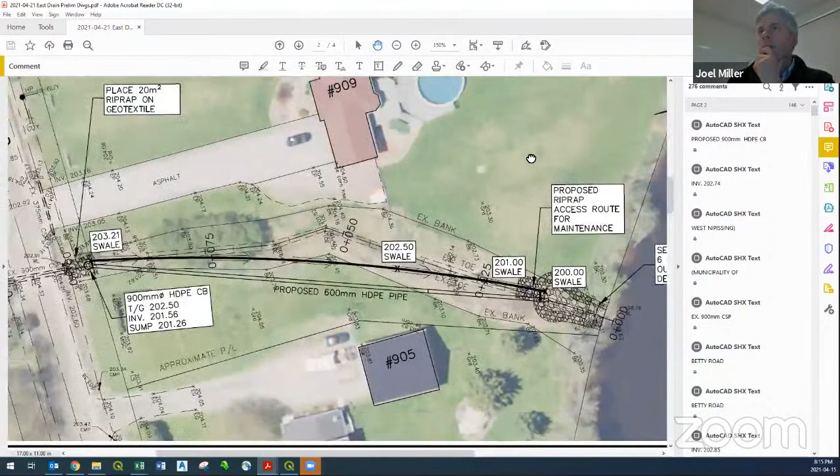John or Louis, can you guys think of anything else that I ought to mention or ask about at this stage design-wise that we need input on? I think you've covered it well, Joel. I would just leave this as it is and let everybody digest what they've heard here. Yep. And if they have any thoughts or concerns, they can get a hold of you. Yeah, exactly. That sounds good. Okay.

So like I said, with this discussion wrapping up, next steps for us are to put our design package submittals out to the agencies to get their review and any comments or input we need from them. And then finalize our detailed design, our assessments, and then set up another public meeting. And the format of that is anybody's guess. If you have a crystal ball, Melanie, let us know what it says, because I am quite interested.

I would really like to, once we hear from the agencies, get this thing to a report stage where I file the report with the municipality late spring or early summer. And then, if we're ambitious and things go well, there'd be a chance to build it this year. That's a fairly slim chance, unfortunately, but I think we ought to shoot for that. So here's my thought, Melanie. For this public meeting later in the spring, we would probably be best served to do it in this format.

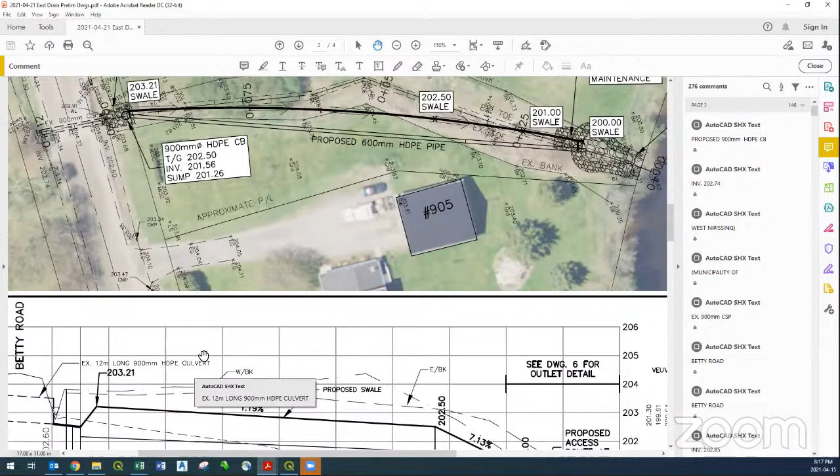Well, obviously under the Planning Act, we've been doing all of our statutory public meetings like this, right? Yeah. So we send out notices and we put the link so that you can participate. You can either dial into the meeting and participate like we're doing here, or you can just choose to watch on YouTube. And we've been doing that with pretty good success for the last year. People are starting to really get it. I think everybody in the world is getting used to this new format. And we do try to help people, we recognize not everybody has computers.

We encourage them to maybe get together with their neighbor who has one or whatever. No, you're not allowed to do that at the moment, but we do try to do it. And you can always phone in. That's the thing, you can always phone in. We always provide the phone number and the passcode.

Yep. And so what I would think we ought to do, just because we know for sure it's going to be possible, would be to do the next public meeting as an online meeting. I would probably though actually be in Sturgeon Falls for the meeting, and then have the option that same day or maybe the next day for people who want to meet with me on site to talk further about any questions, or in very small groups in an outdoors kind of situation, so that truly everyone would have an opportunity to ask me questions or give me input or make final comments.

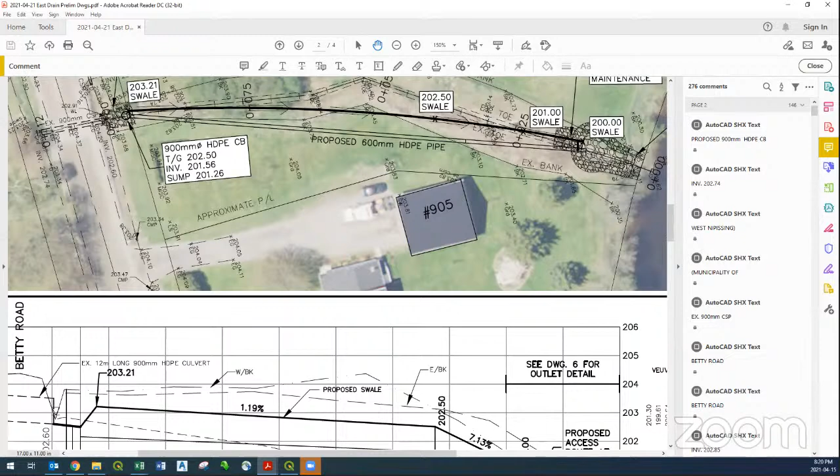All right. Well, to all our loyal fans on YouTube, thank you for watching. We hope you enjoyed the show. We'll be famous tomorrow. Yeah.

Any other items for us, Melanie, from your perspective? What I wanted to mention, Joel, was I know my direction from council was to get this done as quickly as possible, just to make up for the fact that there's been such a lag. I don't mean to say hurry, but could you? I know both the municipality and the affected landowners want to see this dealt with, and our friends a little farther down to the west want to get their situation dealt with as well. So no pressure or anything, just soon. Joel, you just got your marching orders.

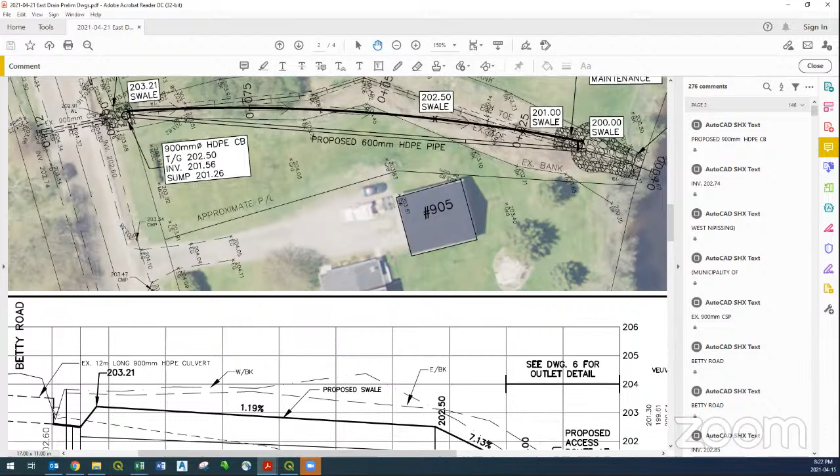I realize. Well, I told them the end of April for my report, but I'm thinking no way. I can call my buddy at DFO and get him to do a 2-day turnaround on his review, and yeah, I know that's not going to happen. Okay. No, just as quickly as we can. I'll bring council up to date on this meeting, and let them know that we've met and we're moving along, and the preliminary design has been shared with the landowners, to let them know we're doing stuff. Yeah, that sounds good.

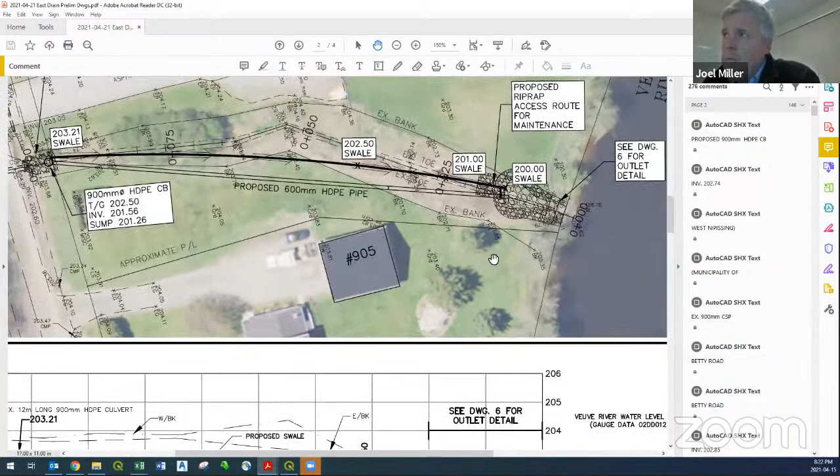And one of the good things that is happening with DFO is more communication at this stage in the project process. So we can get a pretty good handle on what their concerns or priorities are from a fish standpoint early on. That way we can expedite that review time and those sorts of things. So we'll do everything we can. All right.

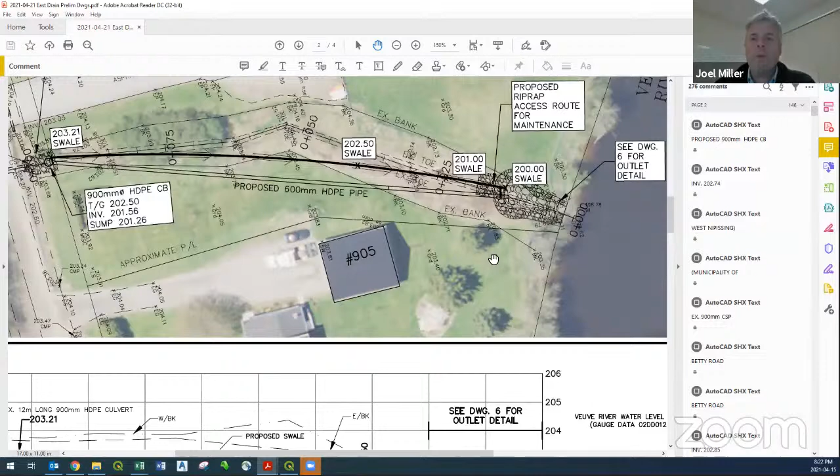Well, I believe that's the end of my speech, folks. I'm glad we could have this time together, and look forward to talking. Well, the next thing that will happen then would be a mailed out meeting notice for the next meeting.